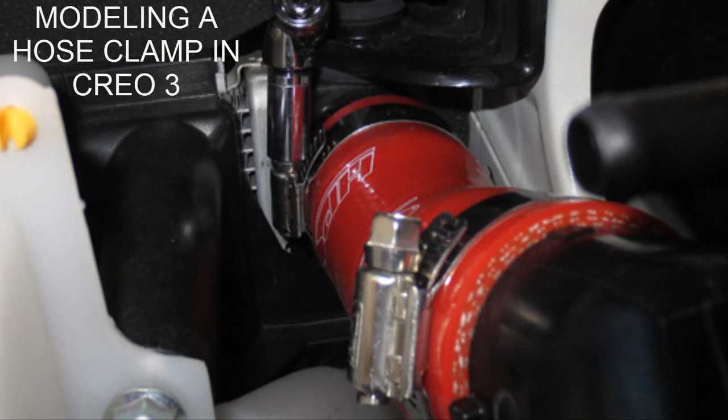This is a flexible hose clamp. It was created in Creo 3. I've got it in this example, and here it is clamped onto this larger tube. I've got a smaller tube here, so I'm going to go ahead and place it just to show how it works. Let's assemble the clamp.

It's called clamp. I'm going to use the flexibility, and instead of by value, I'm going to do a diameter of this. Select OK. Select OK. And zoom out a little bit and drag this into position. And I'm going to use this surface here and that surface there and drag it back over to here and line it up to that. Let's leave it like that.

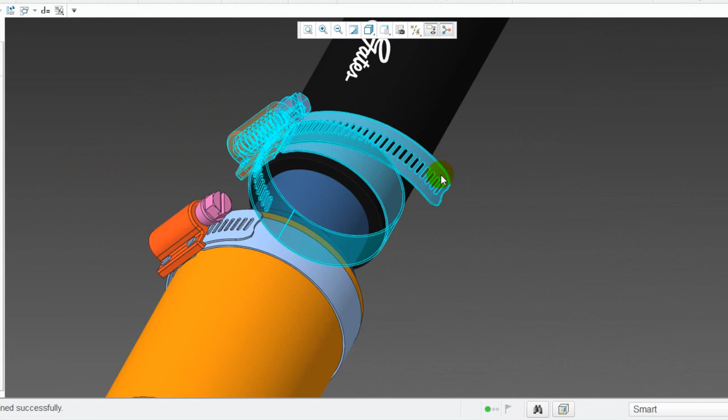So as you can see, the clamp looks like a real clamp that is used in an assembly. This piece comes out as it gets smaller, and that's what we're going to model up. It's got the slots. It's a very detailed clamp. Watching the video, you could determine how much detail you want to put in yours, whether you want to make it a part or assembly. Right now it's existing as a part, but I used other parts to create it and just merged them. That was done for relations reasons.

The screw also turns. If I open that, and I go to a cross section of this thing, you see that the slots are lined up, and that stays. If I make it smaller, this screw will turn to line it with those slots. So that's all done through relations, and you probably won't do that. You don't need it, but it's just an exercise in relations, and in this video we'll cover that.

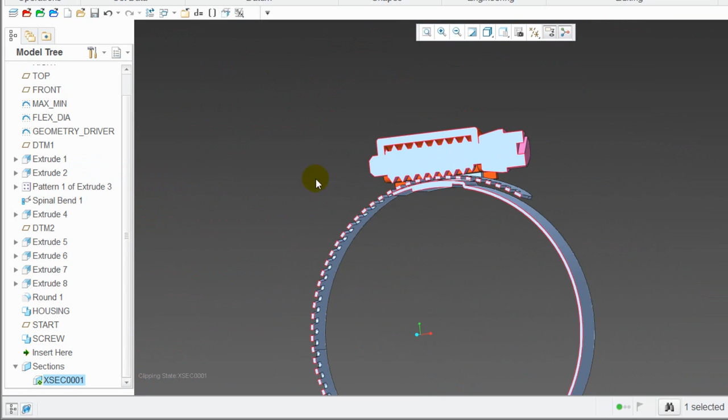Also, this clamp is designed to go from, this one here has got a max min, and you set those dimensions and it automatically creates the clamp for you. So this range here is from the catalog. I've got it out of a McMaster-Carr catalog, and I also downloaded the files from there that I needed to take measurements from. But it's set up so that the clamp will not go beyond.

If you use this in an assembly and somebody tries to put 5 inches for a clamp that only goes out to 2.625, 2 5/8, it will not. It will just go to 2 5/8 and stop. That's as big as it can go. It's set up through relations to stop it from doing that. So if somebody tries to use this on a wrong size hose, it will not behave. It will not go to that diameter.

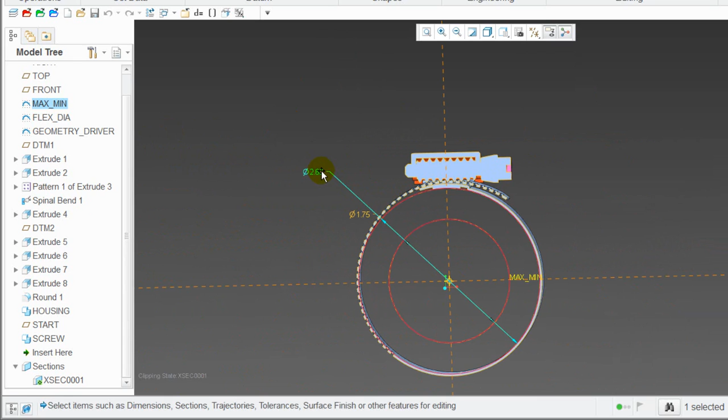But as I said, this clamp could be copied and made larger. Like say if you need another range, just look in the catalog, and there's a whole family of clamps with this screw and housing assembly. And to make a larger one, like for instance, if I want to make a larger clamp, this one's a 2. Let's say if I want to make a 4-inch clamp, I just hit 4, and it creates a 4-inch clamp for me. Regenerate, and there's my 4-inch clamp. And that's all set up through relations.

Let me get this section out of there, deactivate. So there it is. And it does some calculations on how much should be sticking out here. It does a bunch of calculations. The only thing you really probably have to do is the number of slots you want in there. You might have to tweak that as you make a new clamp. And the max min diameter.

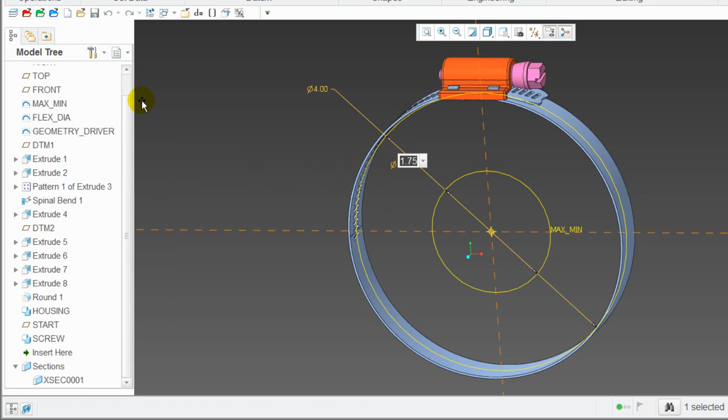So here's the diameters here. So this is the min. It won't go smaller than that. So let's change our minimum to say a 3. So it goes from 4 to 3. So now it's set up so that if I tried to make the clamp smaller than 3 in my assembly, it will not work. So let me just regenerate and show you that it won't go smaller than 3.

So here's our flexible dimension here. I'm going to edit that and try to make that smaller than 3. Make it 2. And you can see it went to 3. Didn't go down to 2. I'll regenerate that, and there we have our clamp. But it will refuse to go beyond your max min. There's our max min controls. So we'll set up relations for that. So let's begin.

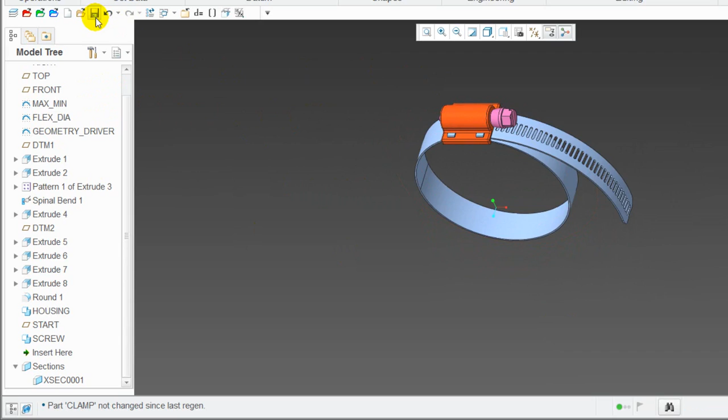This clamp was created from a part that already exists on the internet. It was an IGES that I downloaded. I went to McMaster-Carr's website and downloaded a couple files for a hose clamp, and it was an IGES file. So let me go ahead and open that IGES file. So I'm going to create a new part, and I'm going to call it the source band.

And I'm going to get data, import, and here's the IGES file that I downloaded. And I don't need log files. Okay. So this is what I got off the internet. So we're going to make our clamp look like this. Ours, of course, will be flexible, and a couple of added features we're going to put in there.

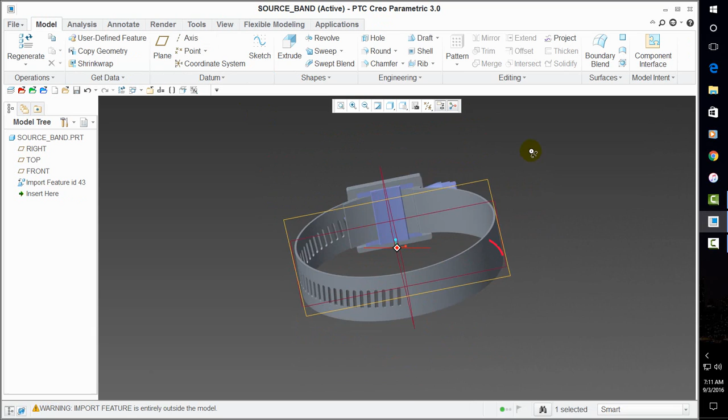We're also going to try to set it up so that we can make any size clamp with this size screw. There's a range of clamps that they make. We'll try to get ours to be able to make them all. The first thing I'm going to do is break this just into the separate parts so I can take some measurements. I'm going to make a drawing of this so I can take some measurements.

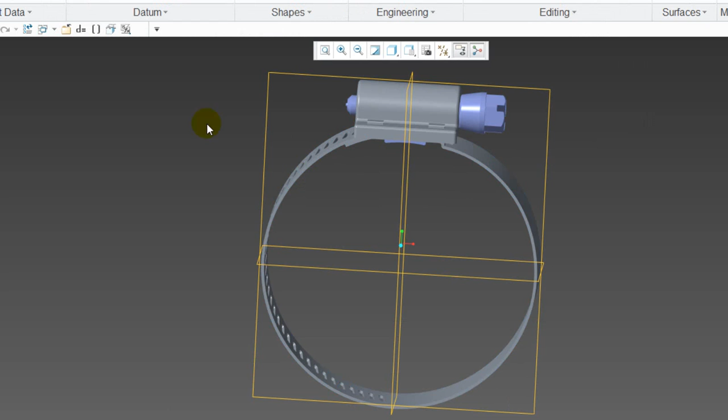So what I'm going to do is break it down into the band, the housing, and the screw. So I'm going to need to save a copy of this. So I'll do save as, save a copy, and I'll call this one the source screw. And I'll save a copy again. I'll call this one the source housing. Okay, so what I'll do is I'll take measurements from here. I could take measurements using analysis and measure, but I think it's faster to create a drawing.

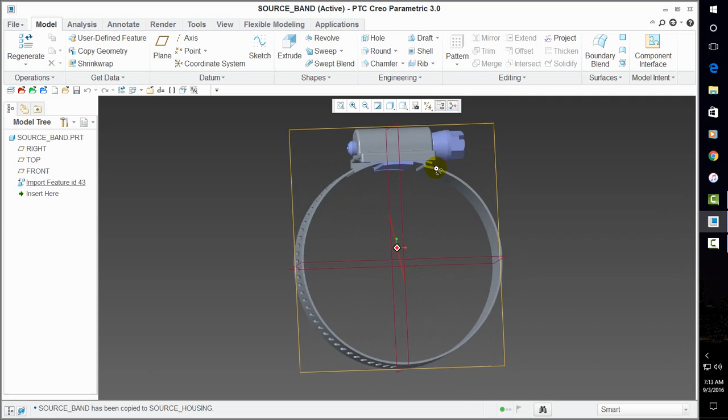I'm not sure if Data Doctor comes with all versions of Creo, but the version I have does have Data Doctor, so I can break this down into individual components, because the IGES was created from an assembly file. So they made an assembly of this thing. And if you have Data Doctor, you can break it down. If you don't, you'll just have to measure everything you can from one part. Maybe just do some cross sections and take some measurements.

But we have Data Doctor, so let's just get the band for this one. So we're going to go to the import feature again and edit definition. And here's Data Doctor here. And once you get it in Data Doctor, the components show up over here. So I'm going to keep everything, but I don't need the screw. I don't need that housing. There's the band I need. So let's just delete those and hit the check. And let's save that. So that's our band.

And one quick thing, this purple piece did not come out as a solid, so we'll have to remember that. It probably came in on some planes. It had some problems. Let's see which plane this thing. Oh, I think I'm gonna get rid of all these planes. Planes, layers. So I got rid of all those layers. My part has default layers, axis, curves, and planes.

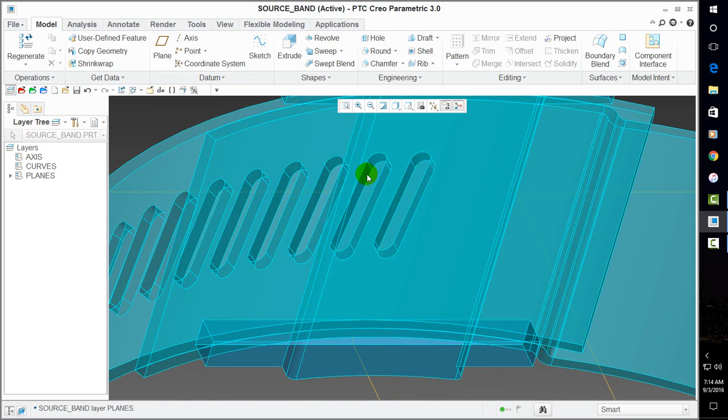Also, we are going to be making some very small features, so your accuracy has to be set. I've got mine set for all my models, but I don't like using Creo's default. And to do that, I've got to go to my model properties. I've got it on my quick access toolbar, but you could find it here in the file, and then you'll find it in prepare and in model properties. If you want this on your quick access, just right click and add it. So let's go to model properties, and I've got mine here.

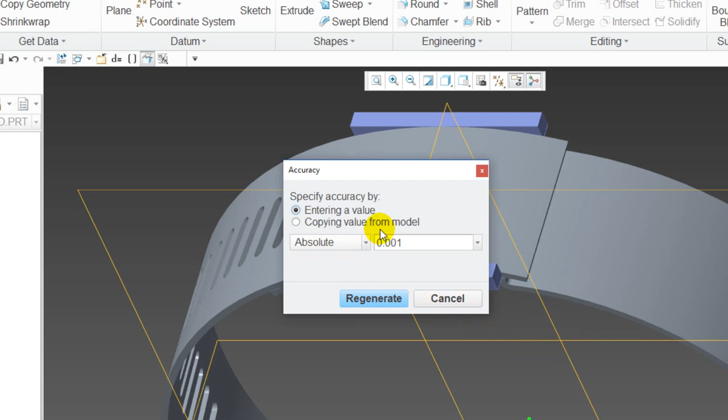And I've got mine set for absolute. By default, Creo has a relative. And all of my inch parts are absolute 1/1000th of an inch. This is my setting. So you'll need to set yours that way too if you're going to make an inch part anyway. Because we are going to be creating some small features. And your start part should be set up for that. So I'm just going to save that.

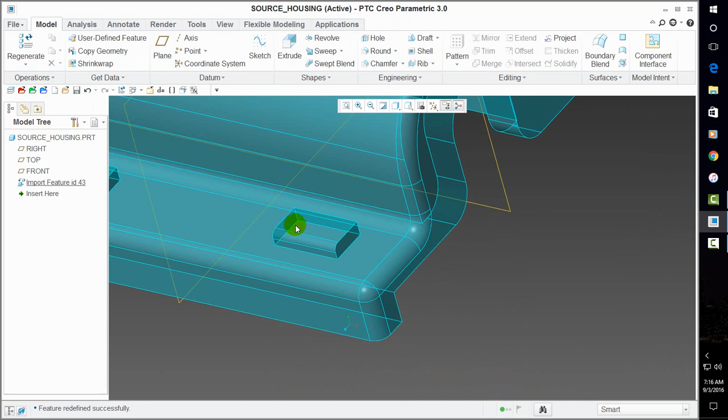And let's open up the rest of them and fix those up. So the band is done. Let's do the housing. So the same thing again. Go to Data Doctor and get rid of everything but the housing. You see the housing has a pocket up in there. And these pieces on top of the housing, that's actually part of the band. We're going to be modeling those in the band, so we'll have to get the dimensional information from the housing here to get those top pieces done. So let's save that, and let's open the screw.

And now I'm going to create a drawing. I'm just going to call it the source. And I don't want to use a default template. I'm just going to put it on a C size. So the first part is pulling in, this last part I had open, source screw, so that's fine. We'll do that. So my default part is source screw.

So let's enter a general view. And let's do front for a view front. And let's scale this up so our dimensions don't get too crowded. Let's make that like 6 times, maybe 8. Let's try 8. Try to fill up the sheet here. This is just so our dimensions don't get bunched up. So I'm going to make a couple projection views here. And I'm going to turn my layers off.

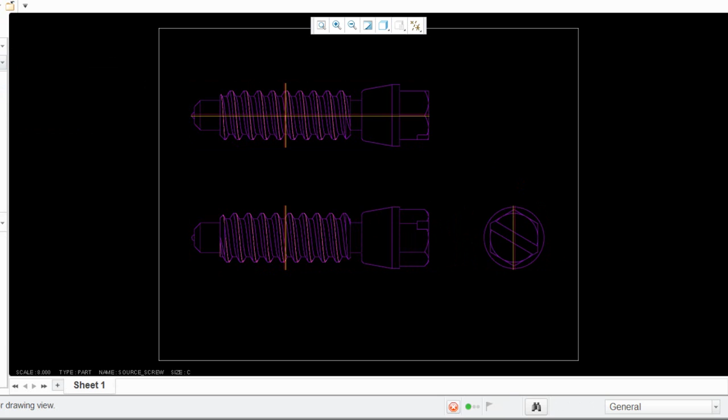And now I'm going to go add a sheet. And we're going to go get another model. So I'm going to go to drawing models, add a model, and let's do the housing next. Insert a general view. Front view. Okay. Scale it. Let's make this 6. Projection view. And projection view. And let's turn our layers off.

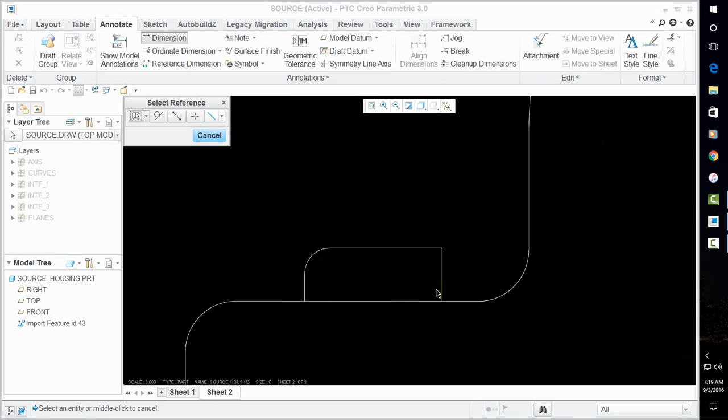And these pieces right here are going to be part of our housing, and that's the part we're going to model first. So let me go ahead and dimension those up. So go to Annotate tab and hit Dimension. Creo 3 is a little bit different, man, dimensioning drawings. You got to hold the Control key down now. I'm going to need this thickness too.

I'm going to go 4 decimal places. I want to see the real numbers here. I don't want rounded to 2. I'll round to 3 just to make it a little bit more accurate. So I'll go to Properties and let's just do 3 places, that's fine. I could default mine to that with a config setting, but I do a lot of metric stuff and that's the way I like it, so I'm going to leave it alone.

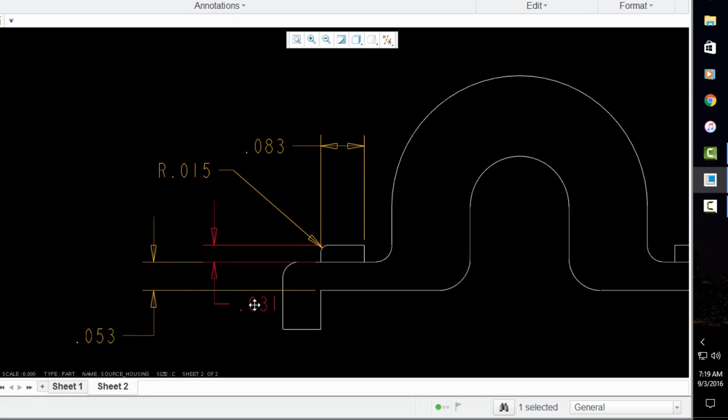Okay, so we have all the dimensions we need from that view. I think we just need 1 dimension from this view.

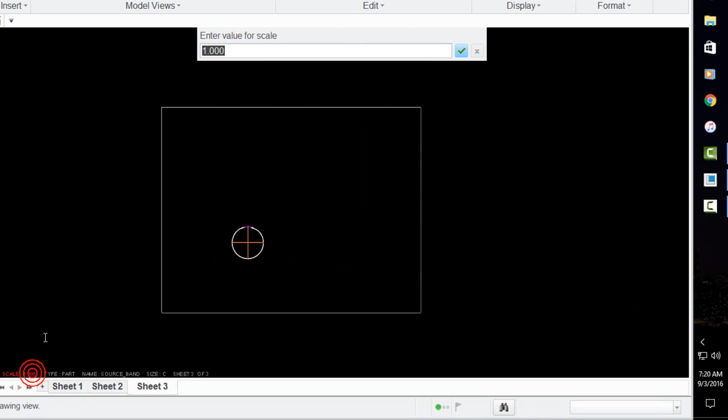Okay, and let's add another sheet for the band. Let's go to our layout, drawing models, add a model, and let's put the band in. Insert a general view, front, and let's get that scaled up to say 3. Yeah, that's about right. Insert projection view, and a projection view again. And let's hide our layers. Save status.

Okay, so for the band, it's just going to be simple. We're going to do a spinal bend because we're going to go ahead and put these slots in there. So we're going to need to do a spinal bend. So we're going to draw a spine, and it's going to have this little S in there. It's going to go around.

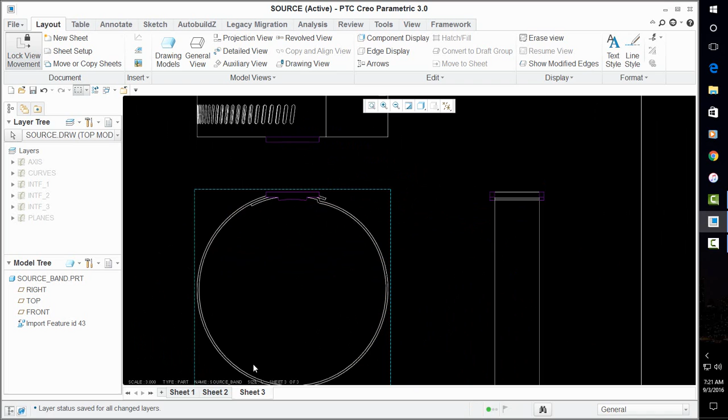Ours is going to go around about 3/4, so we'll have a 3/4 correct diameter, and then the band is going to go over and overlap. So we're going to have this overlap in there, and then we're going to create this purple piece. This piece is there for mounting our housing, and it's actually welded to the band. So let's go ahead and get some dimensions off of this. Let's go to Annotate, Dimension, and Overall here.

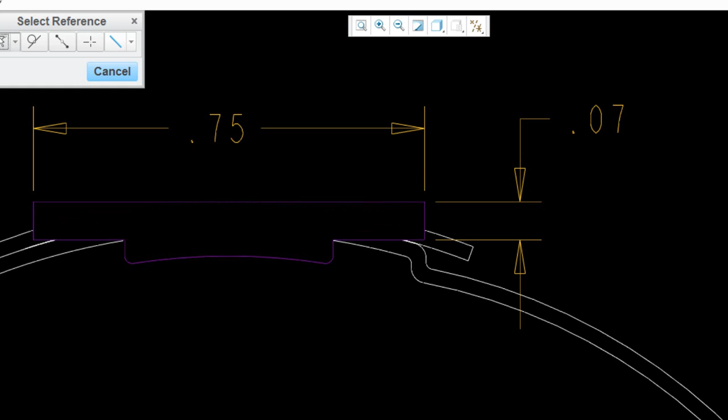Oh. And we're just going to make this piece the same diameter as this, and we're going to let that change, even though in reality it doesn't, but we're just making a model that's going to not give us interference. In reality, this thing actually embeds itself into the hose, and we're not going to do all that. We just want a good representation of the clamp.

And let's get the overall width. The bandwidth. And how about the thickness of this? Oops.

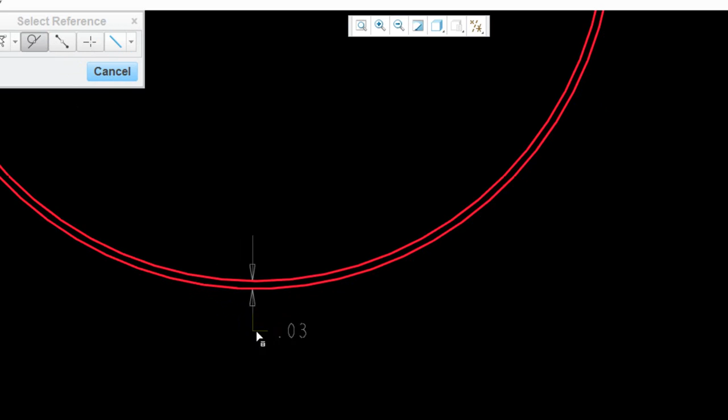And I want to change all those to 3 decimal places, so I'm going to go down here and select my dimensions, do a window around everything, properties, 3 places. Should be good enough. Yep, so our band is 28 thousandths, 5/8 wide. And the only other information we're going to need from this is going to be these slots.

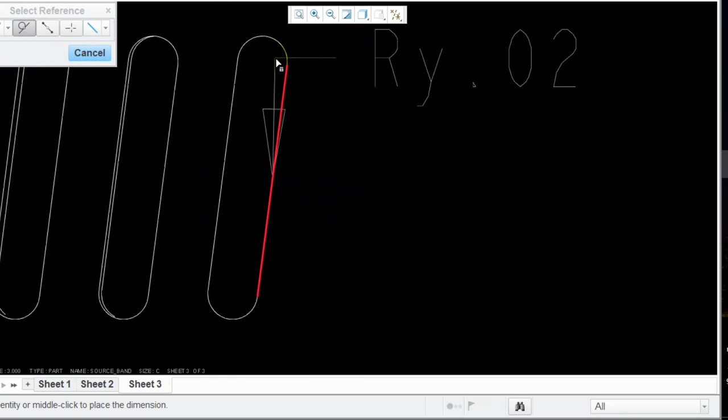So these slots, if you try to dimension them, you'll find that these look like straight lines, or highlighting the straight lines, but they're not, because they came in deformed. This is an IGES file. So the only dimension that we can get from here is this angle. So let's go ahead and measure that angle. Let's put a dimension on there.

So dimension, let's do the line. Draw an imaginary line, because there's just a bunch of points here. So we're going to draw an imaginary line. So I'm going to select 2 points, that point there, control key down, and some point at this end, and there's our imaginary line.

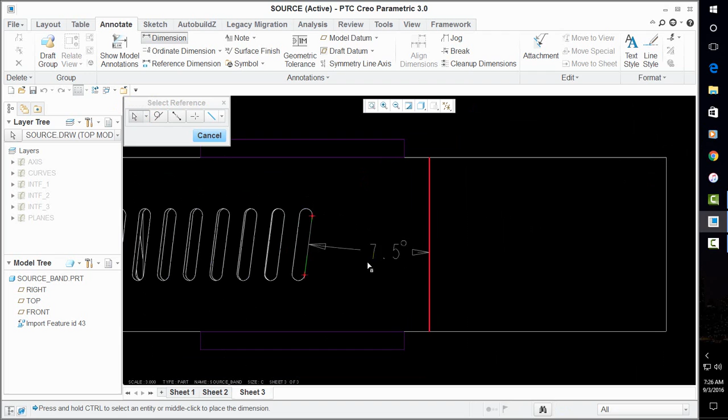And then I'm going to hold the control key down. Oh, got to select over here, hold the control key down, and let's do, yeah, this is fine, that one, and that gives us our angle, 7.5. So there's all the dimensions we need, 7.5. That's all that we can get from the drawing.

These slots are going to have to be measured, so let's just measure those slots and write it down. So to measure the slot, I'm going to go to Analysis, Measure, and I'm just going to do between 2 lines. So that line, and there's one over here, right there, that line. And that distance was 0.2135, let's just say 21.

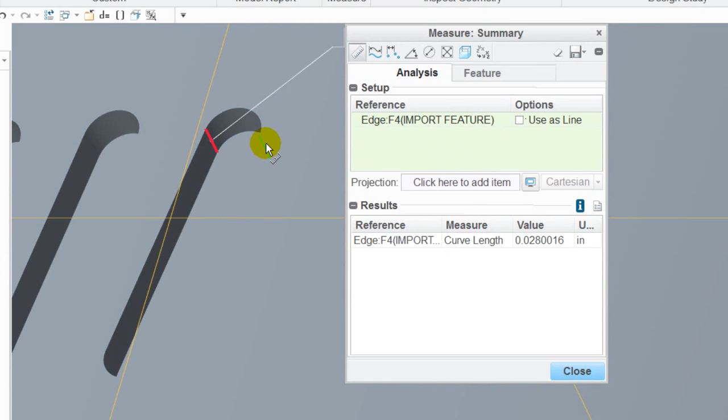I'm going to remove this one and do the line over here. There's a line over here, control key down, pick that one, and now we have the width of our slot, and we're just going to say 0.046. That's all we're going to do. So I wrote that information down.

Now let's go ahead and make the band. So let me close this, let me save my drawing. Okay, we're ready to go. So let's go ahead and make the band now. And like I said, we're going to make a spine. The spine is going to go in the middle, and I'm going to do a quick demo before we make that to show why I'm doing it in the middle. It's because of this S. Let me get out of here, and we'll create a new file, new part. We're going to call this our clamp.

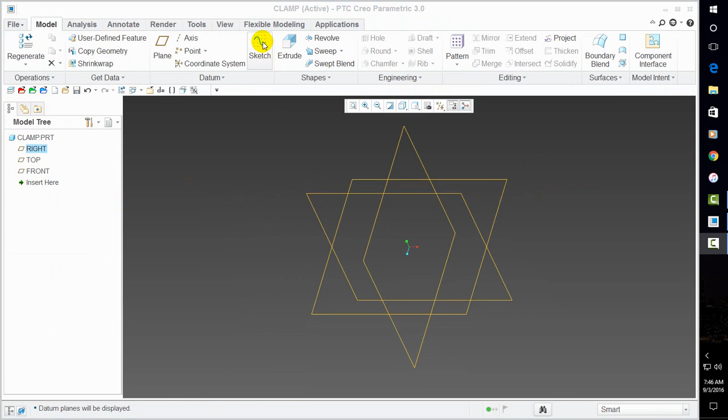Before we model our spine, I'm going to model up a temporary one just to illustrate a point. So I'm going to select Sketch, and I'm going to select front plane and sketch on that plane. And I'm just going to create a line from here to there. I'll make it like 5 inches long. So there's our line. And I'm going to create an arc, a 3-point tangent end. There, to there, here, to there. I'm going to make them equal.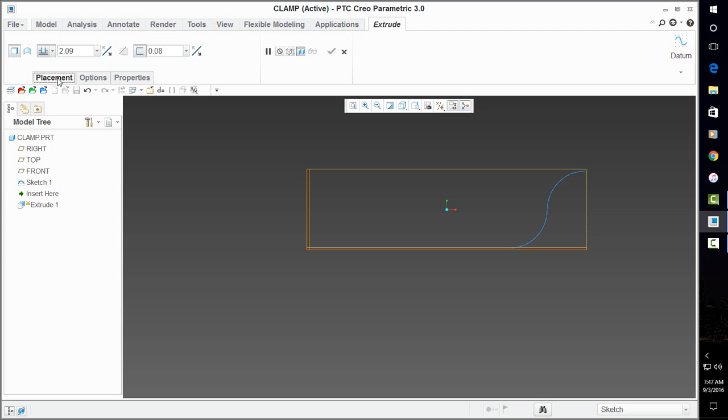Select OK. And then I'm going to draw an extrude. And I'm going to make it a thin. Now for placement, I'm going to use the same sketch plane. Use previous. I'm going to turn off my planes here. Now I'm just going to draw a straight line. Somewhere there to there. That looks fine.

Now it's a thin, and it's creating all the material on the top side, and if I click this again, it'll put it on the bottom side, one more time in the middle. But I'm just going to put it at the top for the demonstration, just all the material on one side, just to illustrate something. So there's our material, and I'm going to use a spinal bend to make it form into this. Now the material will stretch to fit this spine. If it was too big, it would shrink to fit it. And we're going to make those adjustments when we do our clamp. We'll set up some relations for that.

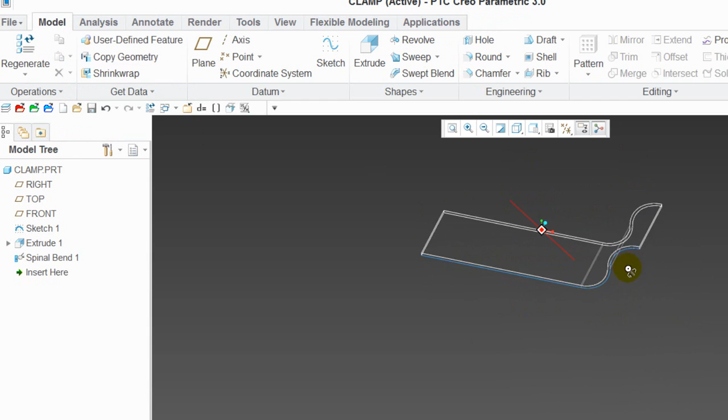So what we're going to do is just use a bend here, a spinal bend, and it's asking me to click here to add bend geometry, and then click over here to pick the spine, and I did, and you can see it has given me a preview. It's worked fine, and there's our spinal bend. So it did stretch the material to meet the ends. You could lock that and keep it from doing it, but for our case, we want that to happen.

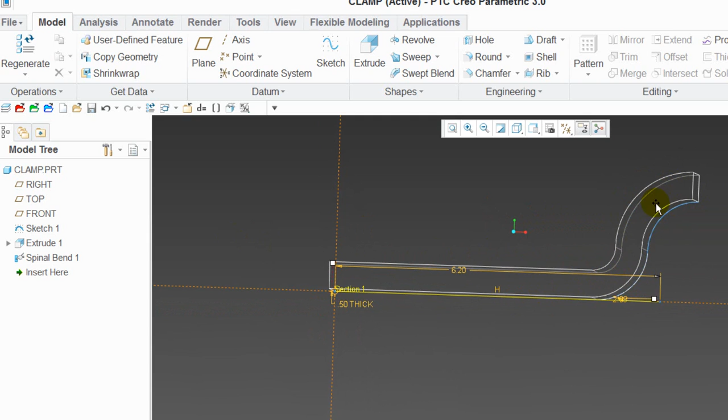Now watch what happens when this band gets very thick. I'm going to make it, say, 0.5. So you can see how this S is not being created correctly. It's like there's a different radius here. This outside radius is different from this outside radius. I want those to be equal. That's how it is in our IGES file. Those are equal. So by having the spine like this and having the material on one side, it doesn't create what I want. So I want that material in the middle so I can have the spine in the middle, and it will be equal when I do that.

So let's go ahead and do that. Let's go to Extrude and Edit Definition. And this time let's put it in the middle. So that's the bottom and this is the middle. Select OK. And now you can see the spine is working fine. These are the same. And that's what we're going to need when we do our band. So let's start over. Let's delete this. Oops, forgot to delete them both.

And let's redefine this. Let's delete everything we got. Go to Sketch View. Mine doesn't automatically go to Sketch View; I got it set up that way. So the first thing I'm going to do is draw a circle for the diameter, the hose diameter that we're going to be clamping. Ours has a maximum value of 2 5/8 and a minimum of 1.75.

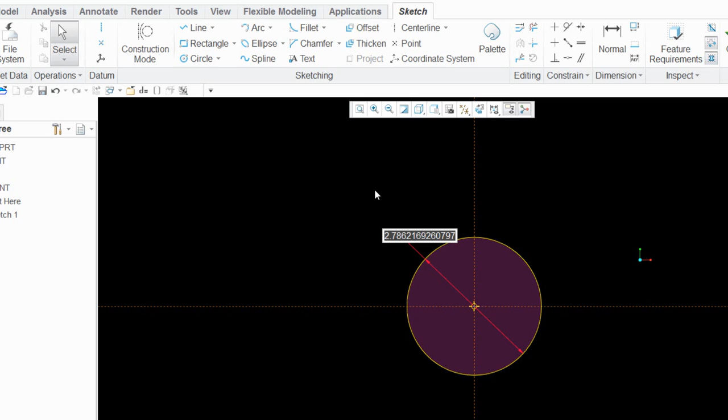So let's set it at maximum 2.625, 2 5/8. Now this is going to be our driver. This dimension here will change. We're going to have a flexible dimension that's going to change this dimension, and that will be explained later why we're doing that. But for now, this dimension is going to change. It's going to change the size.

So if we were to use this as the spine, half the material will be on the inside here, half will be on the outside. We don't want that. We want this to be the inside diameter. If we were to do this, we would get half a band thickness sticking on the inside of our inside diameter. We don't want that. So we're going to have to create our spine. This is going to drive our spine, but this is not going to be the spine. This is just going to drive it.

And I'm going to go ahead and create an arc, center ends. Now this will be our spine. I'm going to pick some point here, swing it around, and click it here. So our model is going to have good geometry. This diameter is going to be the correct diameter all the way around through this. Then it's going to overlap. Okay, we're not going to go into some elaborate thing where we actually compress the hose or anything like that. We just want a good representation of the part, a good model that looks just like the part.

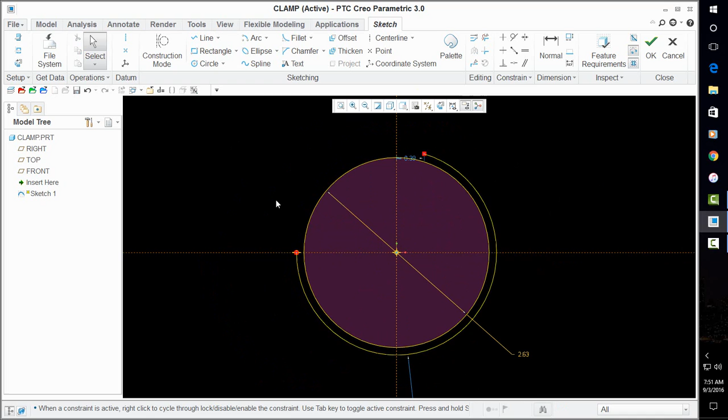So to get this, I need this to be 14 thousandths away from this, because the band is 28 thousandths. I need half of it to be on this side and half of it to be on this side. So to do that, I'm going to create a circle, put it at the intersection of that horizontal reference and our arc, and then I'm going to snap it to tangent right there. I middle mouse to lock it on there, so it's locked now. Middle mouse will lock it, so I have my tangency there.

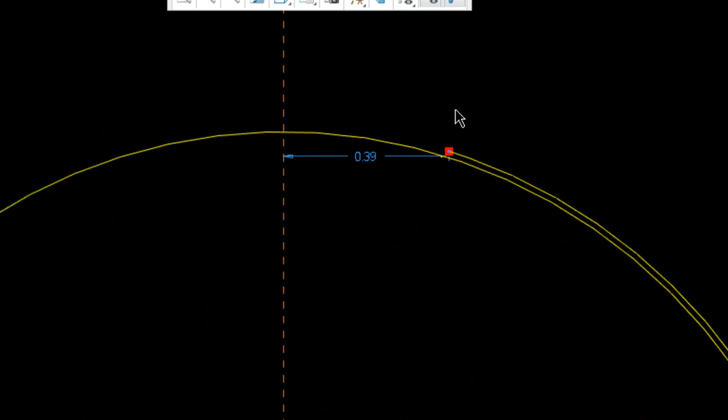And now I'm going to put a dimension on there. I'm going to double click this to get a diameter dimension. And that's 0.028, the thickness of our wire. So now our wire will be half on this side, 14 on this side, 14 on this side, which matches our inside diameter. Now I'm going to create the transition where we go around that bend there, that S bend that we just demoed.

And let me create another arc. And I'll go from here somewhere over to here somewhere. Don't let it snap to anything. Don't let it auto-constrain something. To do that, let me just do that again. Let me just create this arc there. See how it's trying to snap? It might try to snap to things that you don't want it to. So like if I pick here, it's trying to snap to there. You see that one, that constraint there? Watch for those types of constraints being brought in.

Don't let it snap to anything. And to do that, you can hold the shift key down and it won't snap to anything. I'm holding the shift key down. If I don't hold the shift, I get the automatic snaps. Holding the shift key down won't let it snap to anything.

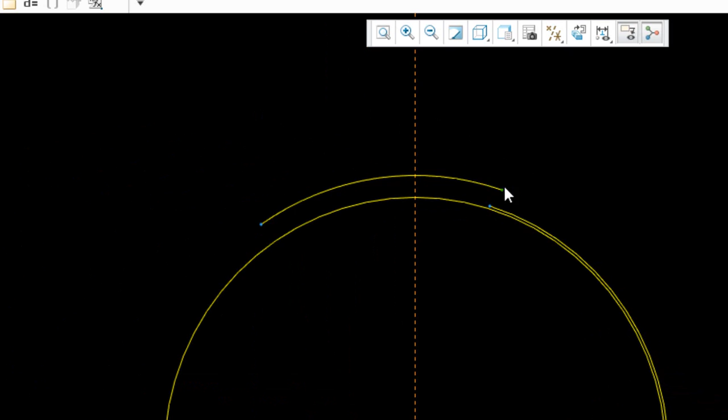So I'll bring it over here somewhere and create another arc, but this time it's going to be a 3-point tangent. And we'll create it something like that. And then again, from the end of there, over to there, make a tangent. So these two are tangent. I need tangency over here, so let's go grab it. Tangency. So they're all 3 tangent. So I'm going to do a corner trim, this piece and this piece. And then I want these to be equal radius. And that's what we want.

Then we're going to set up some relations to get them to the correct size. But right now, I just want to demonstrate something. If I move this curve, see how these arcs are behaving? I don't want them to do that. I want them to stay on a common diameter reference. So I'm going to line these centers of these 2 arcs up to a diameter that's centered on this one.

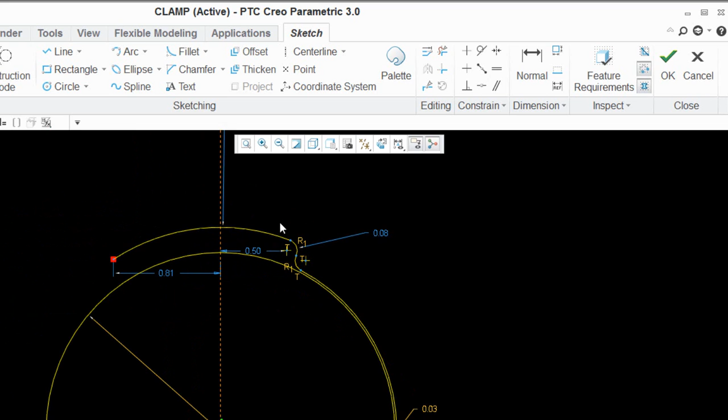So I'm going to create an arc, center and ends. Oops, center, pick here and close to there, and let's go get our constraint here, our coincident constraint. So that will line these 2 up, the end of that arc to that center. So now they're lined up. They share a common arc. They're both the same size. Now when I move this, this dimension here just gets smaller and bigger as I move it, and that's what we want.

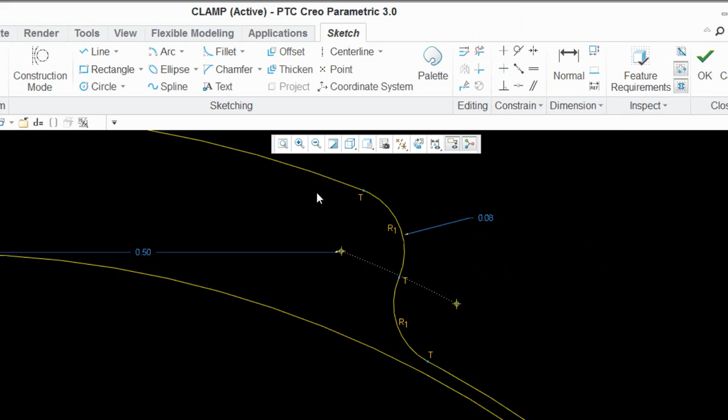That's the action we want on there. And I'm going to create this as a construction line, so I'm going to click on it and go to construction. So it's a construction line. Anything that's not part of my spine that's going to be used to create my geometry, I'm going to make that construction, including this piece here. Okay, and this circle here. Alright, so anything that's not part of my spine is going to be a construction.

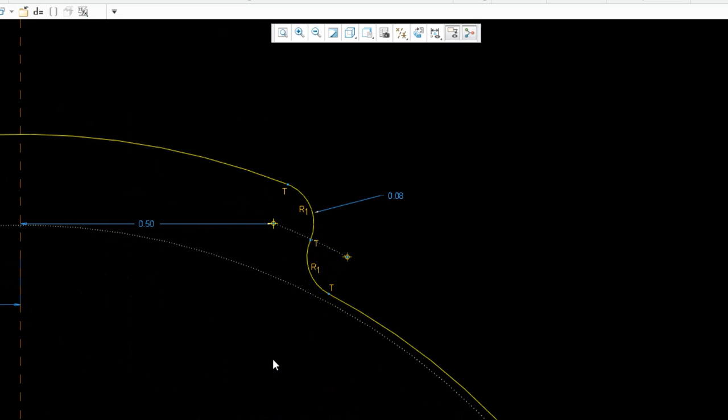Next, I want to set up a relationship between these arcs and this diameter, and I want this arc to be a little bit bigger than half of that diameter, which is basically a little bit bigger than this radius, just a little bit bigger. And I'll show you the results of that when we create our spinal bend and what would happen if we didn't make it a little bit bigger.

So let's set up a relation, and relations are in the tools, relations. Mine is in the quick access toolbar here. And to do that, you just click on relations and move it to the quick access toolbar. So I'm going to select relations, and I'm going to select sketcher dimension 12 here. I'm going to set that equal to, I'm going to do a space equal because I like spaces so I can read it. And I'm going to select sketcher dimension 5, and I want to multiply that by 0.55, a little bit bigger than half. So there it is, down to size. Now this is a driven, relation-driven dimension.

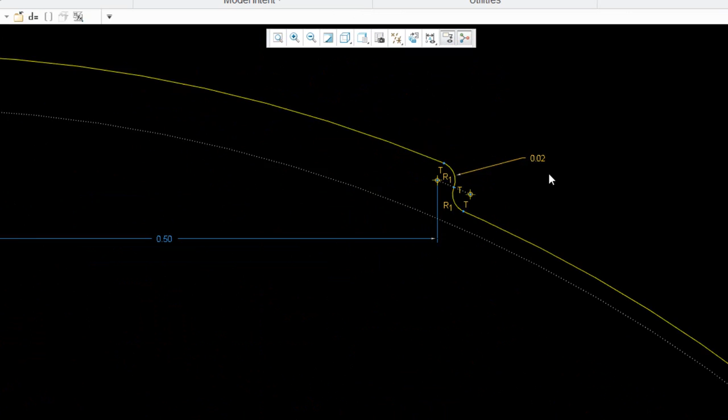Next I want to come over and I'm going to draw an arc here. Let's go back to our sketch tab, and I want the 3-point tangent end. Pick the end of our arc there, and now it's automatically tangent, so let's bring it somewhere close to there, and then over another one that's tangent. And then don't let it snap to anything, like see it's trying to snap to a radius, or see that radius trying to snap in. Don't let it do any of that.

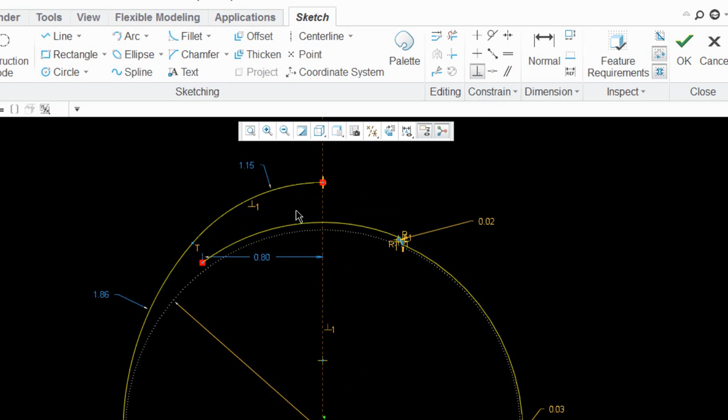Let it bring a point, put it on that vertical. Oh, I didn't do it. I was going to put it on there, so let's go ahead and do that. Make it coincident. This point should be on this line. Another thing, I want this arc to be perpendicular to this line, this reference. So I'm going to hit the perpendicularity and select this piece, and now they're perpendicular, and basically that just puts it right on this line. That center of that arc is now on this line. I could have done a constraint there. I like this one better, perpendicularity, personal preference.

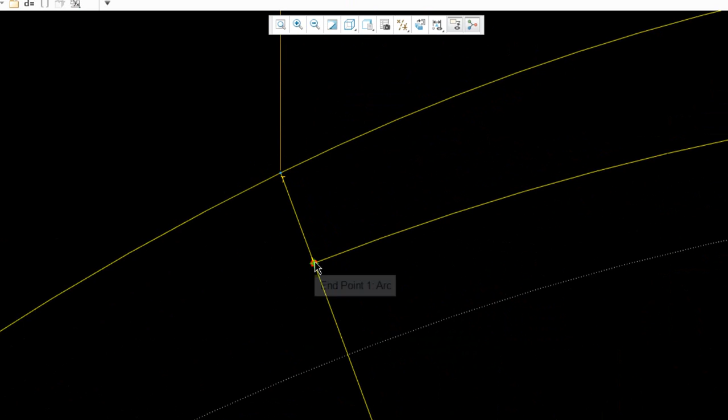Next part of the construction, another line from the center out to this point right there. And then I'm going to align this end to this line. So alignment, this end to this line. And I want a dimension. I don't want radius dimensions, so I don't have to do calculations on what they should be. So I'm going to set up some other dimensions to get rid of them. I want this to be a dimension, and let's make that 0.5. And this material is going to be 28 thousandths thick. So the distance between these two has to be bigger than the wire, the band thickness.

So if I draw a circle here, I'm going to just put it out there, no dimension on it, no constraint. It should show up with a dimension in it. Then I'm going to make this tangent to this. Now this radius, which is this distance here, has to be a little bit bigger than the wire, the band thickness. So that's what I'm going to do. This is a diameter dimension, so I'm going to go to dimension and click this once to get a radius dimension.

And I'm going to make that a little bit bigger than the diameter of the wire, this diameter down here. So I'm going to go back to my relations, and I'm going to select Sketcher dimension 25. I want that to be equal to Sketcher dimension 5 times 1.1, a little bit bigger than that diameter. That's what you get. And this line, this circle, and this line construction.

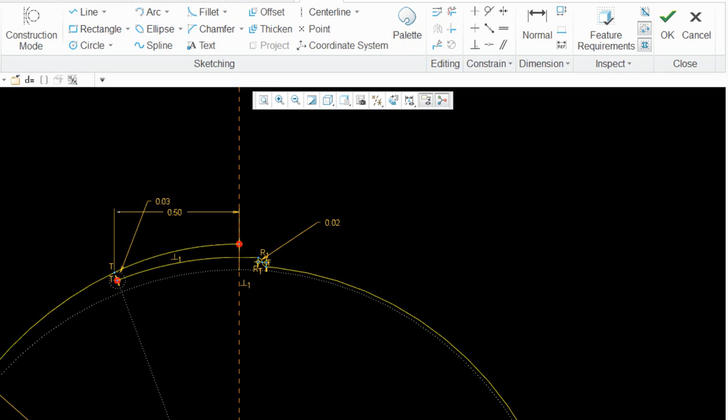So far we need one more piece, and that's the piece that hangs out here. As the clamp gets smaller, when we flex this thing, this piece that I'm creating will come out further and further. So another 3-point tangent end. Pick here, the end point. It's already tangent, so just bring it out to here somewhere.

And I'm going to set this up initially to be bigger than the radius of our inside diameter. So it's going to be a little bit bigger than 2.625 divided by 2. I'm going to make it 1.4. See how that's sort of pointing towards my arc? I want it to point away.

And we're going to set some relations up. When we create new clamps from this one, we want this to all be automatic. Right now the way I'm setting it up, if I change the wire thickness, everything is going to change proportionally and I won't have failures. If I want to change this thickness, I want all these relations to be held true, so that if I do change it, I don't have to go in here and mess with this curve.

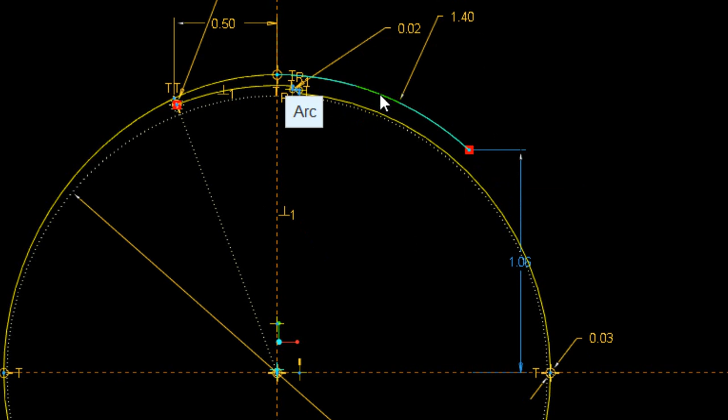Need another line to go to here. The reason why I don't like this dimension controlling the position of this endpoint is because as this comes out, it'll fail. As soon as I try to go to 0 here and flip it to the other side, it'll fail. So I need an angular dimension. I'll put it from there to there, and get rid of this dimension by making an angular dimension. So now I don't have that linear dimension.

Make that construction. And now for our final dimension, we're going to throw a perimeter dimension on here. Because when we change this inside diameter, the combined lengths of these arcs cannot change. You don't gain and lose material when you change the size of this diameter. So this must remain constant. So we're going to create a perimeter dimension.

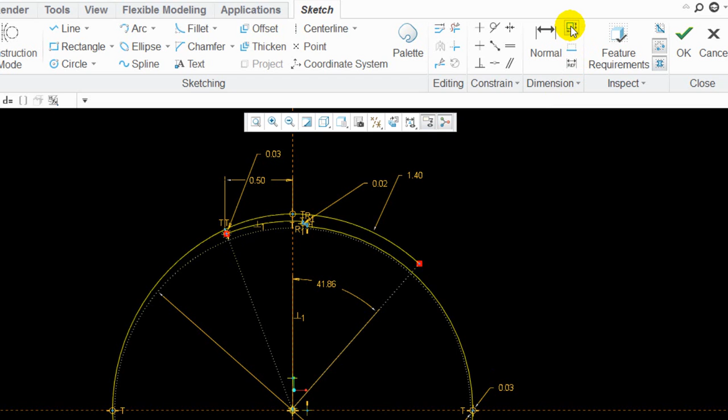So I'm going to click up here on perimeter dimension. It's telling me to select one or more items, so I'm going to select all the pieces in my spine. That piece, control key down this piece, this one, and so on. One more over here. I'll select OK. In the lower left, it's telling me select a dimension to be driven by that dimension. So I'm going to select this one that I just created. And now that's a variable dimension.

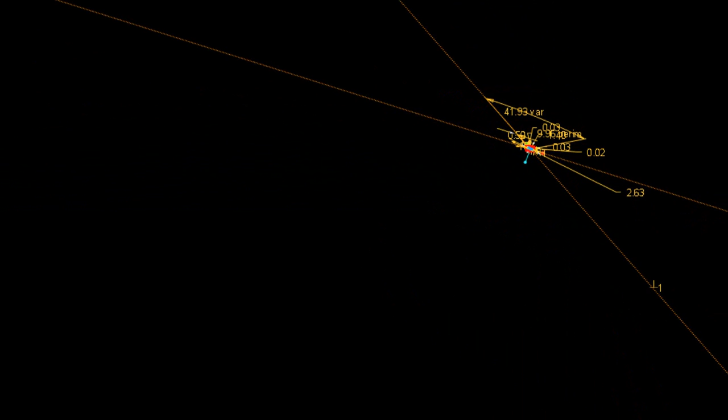What that means is this is going to change if I change any other dimension, to maintain the perimeter. For some reason, Creo likes to throw it way out in space, but just grab it and bring it back. Go to sketch view. So there's our perimeter dimension. Even when I change the inside diameter, this is going to be constant. To make it constant, this dimension will have to get bigger.

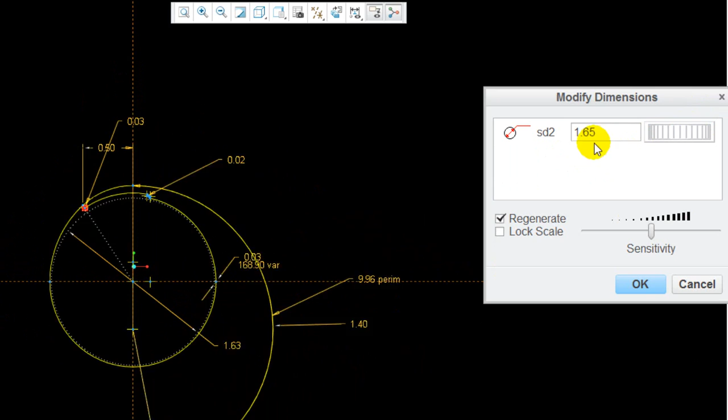To demonstrate that, I'm going to select this dimension and modify. Let me move this out so you can watch. This dimension is going to stay constant, and this one is going to vary as I modify that inside diameter. Notice the 9.96, and you'll see what it's doing as we get a smaller diameter. That's exactly what we want to see happen. Cancel. I think we're done with this, so let's select OK. And there's our curve. Let's save that.

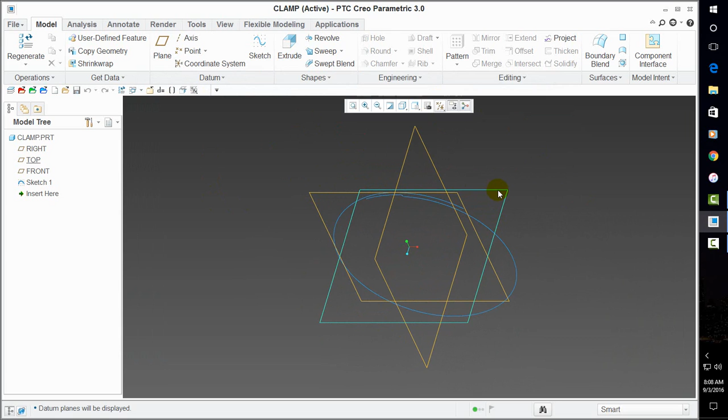Okay, so now we're going to model the solid geometry and have it bend around here. Let me turn our planes back on and get it in default orientation. If I try to sketch using this sketch plane and this reference for orientation, and I sketch a line at the end of this going straight out, as this clamp gets smaller, this point moves. So it's going to throw my sketcher off. If it goes all the way around to the other side, it could flip the other direction. I've seen that happen.

So to ensure that that does not happen, we're going to create our own orientation plane for our sketch. I'm going to have it go to the end of this arc and normal to the arc, so that it will always be in the correct orientation. It will never change. When you're in the sketcher, it will never change. Even though this is moving, the sketch reference frame is moving with it.

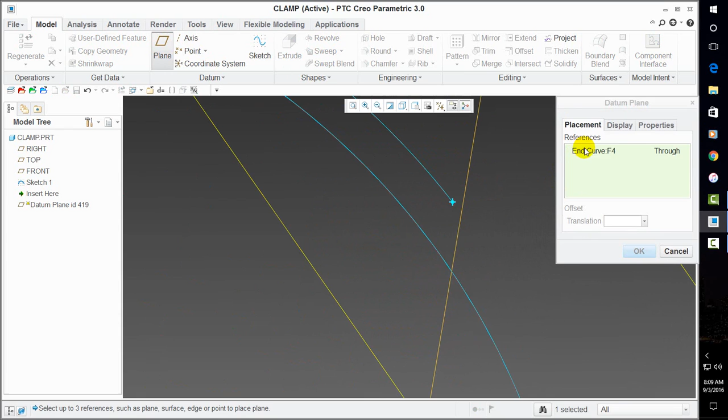So to do that, let's go ahead and create a plane. I'm going to pick the end of that arc, and you'll see end of curve. Control key down, pick the arc itself, and normal, and that's what we want, through and normal. So there's our plane. We're going to use that for orientation. I'm going to set that plane to orient this in a certain way, and it's going to maintain that orientation no matter where that point goes.

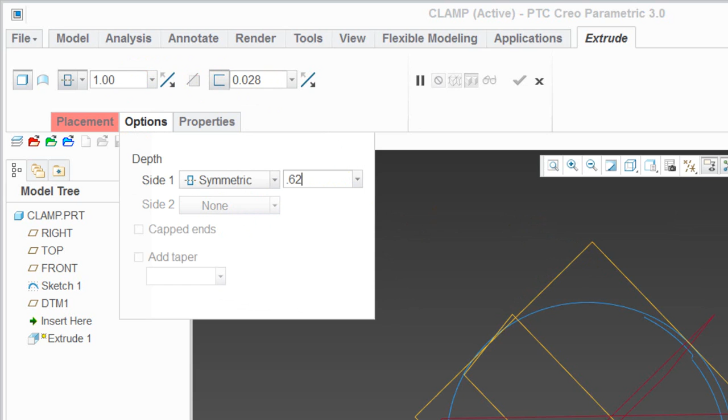So now that that's set up, let's create a sketch, extrude, and we're going to make it a thin. It's going to be 0.028, so let's put that in. And it's going to be 5/8 wide, so let's put that in. And it's going to be symmetric, so let's go to options and make it symmetric. I want the material on both sides of the front datum plane. So 0.625 symmetric about that sketch plane. And I'm going to select our sketch plane here.

And Creo has automatically selected this plane here for orientation. Look at this. It's selected the right plane. I don't want the right plane for my orientation. I want the plane that I just created for my reference orientation. So I'm going to click in this box and select the plane that I want. This is the plane here that's connected to the end of that. So I'm going to put that one in there and select sketch, sketch view,

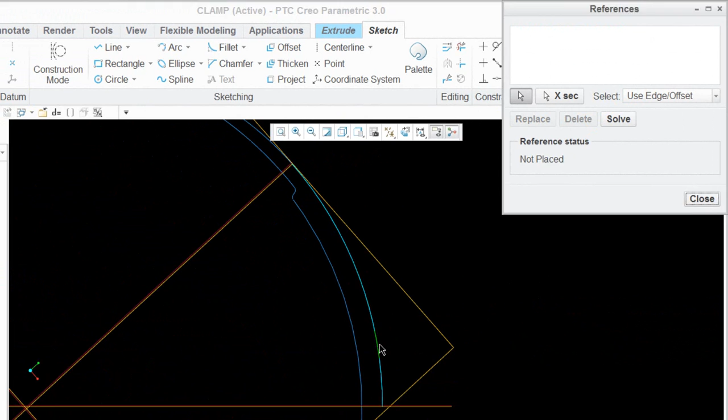and I'm going to get rid of this datum 1. I don't need that. The only thing you need for reference is this arc itself, not the end of the arc, just the arc. Select close, and I'm going to turn my planes off. And now I'm just going to draw a line, and I'm going to make sure it's tangent. I'll lock it on with a right click. It doesn't matter how tall, we're going to set relations up for that. Select OK.

And now you can see that our material is being created on one side. We want it in the middle now. So let's just select this and get it in the middle. Other side, and now the middle. And that's what we want. So there's our material. Let me get it into a shaded mode. There's our material, and you can see it's symmetric about our sketch plane. Half of it's on one side, other half on this side.

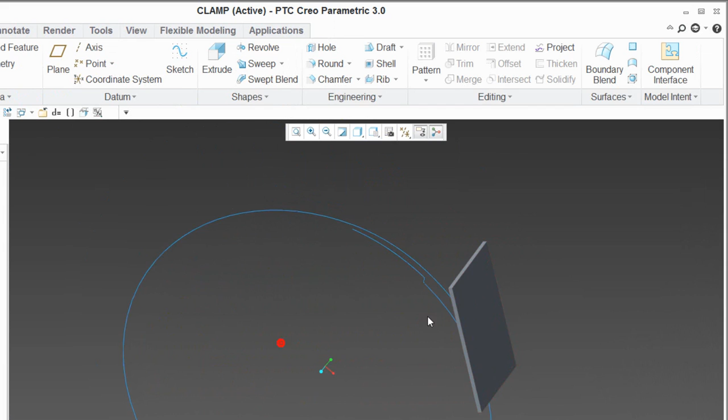Now what we need to do is set the relation up for the length of this piece. Because if we just use it this long, it'll stretch it around there and make our material. But we're going to be putting slots in here, and if we do that, it'll just stretch those slots. So we want to make the length of this extrude here the same length as the perimeter of this arc. So let's go ahead and do that.

We'll go to our relations again. Remember, it's in tools, relations. And I'm going to select this feature here, and I'm going to select dimension 28 there. That's the length. I want that length. Click in here, space equal. I put spaces just so I could read it. And I need it to be equal to the perimeter of this.

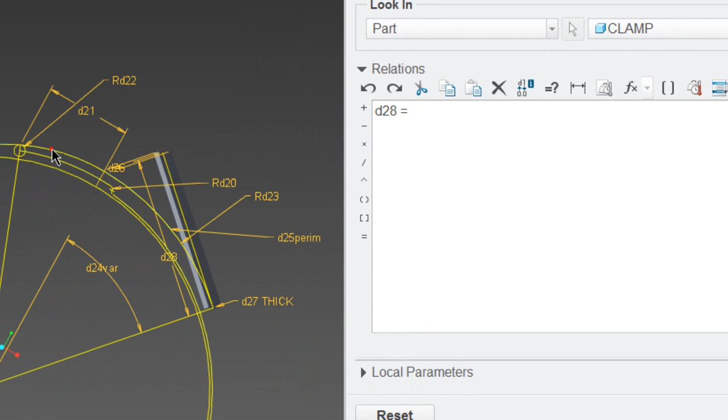And there's the perimeter. Creo puts PERIM after a perimeter dimension. It automatically does that. So I'm going to click it, and I want those to be equal. Select OK, and I'm going to regenerate. So now this piece is the same length as that arc, those curves together.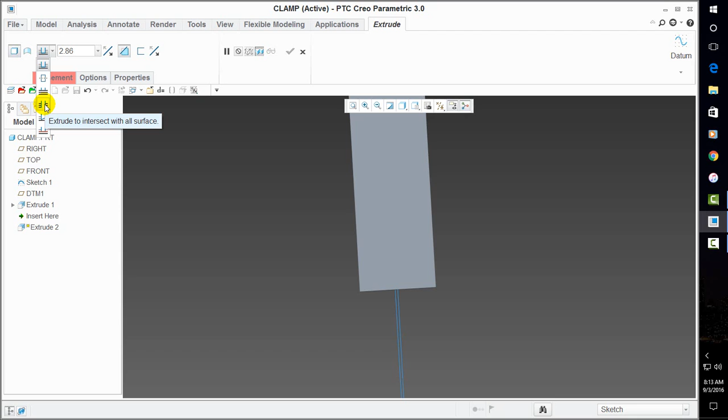Okay, so let's create some features. I am going to create a couple features that are actually not on the model, but I see it on the part. So I'm going to go ahead and create those first. Just some end tapers, lead-in tapers. So I'll do an extrude, and I'm going to remove material, and I'm going to go through all, which is this one here. All surfaces. So it's just going to go through everything.

And then for my placement, I am going to define it as this surface of our protrusion extrude right here. And it's selecting automatically the right surface to be the right side.

I'm going to say that's fine. I'm going to sketch. I'm going to also need a center line down between here because I'm going to make a symmetric feature. So I'm going to need this front plane as part of a reference. So I'm going to select my references here and select that front plane. And that put a center line in for me. That's why we made the piece symmetric, so we can do this.

So let's go to sketch orientation here, sketch view. And I'm going to switch off shading. And I'm going to create a center line, a construction center line, not a center line, it's a construction center line. I'll put it vertical, lined it up to there. Next I'm going to put an arc on there, a 3-point tangent end, but there's no end here. So it's not going to snap to any end. So put it there and then somewhere over here.

And let's lock on right-click tangency. Let's right-click tangency there. Let's draw a line from here to here to here. And I don't want to have a radius dimension. Make sure these are tangent. Those are tangent, right? Yep. Okay. I see two tangencies there. Oh, that's tangent with that. Never mind. Okay, so instead of radius dimension, I'm going to put two dimensions here.

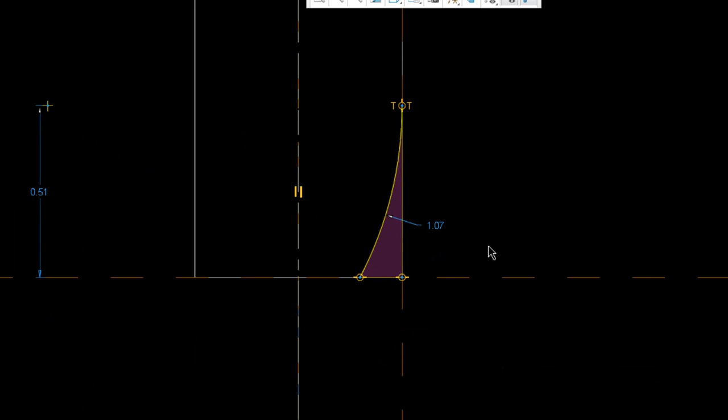I'm going to put this dimension, and I want that to be like 0.2. And this dimension, I want to be 0.1, something like that. That looks about right. And I'm going to mirror that. So I'm going to middle mouse to get my white arrow there and select everything. And then I'm going to go over here to the mirror tool and select the center line. So I have mirror geometry there.

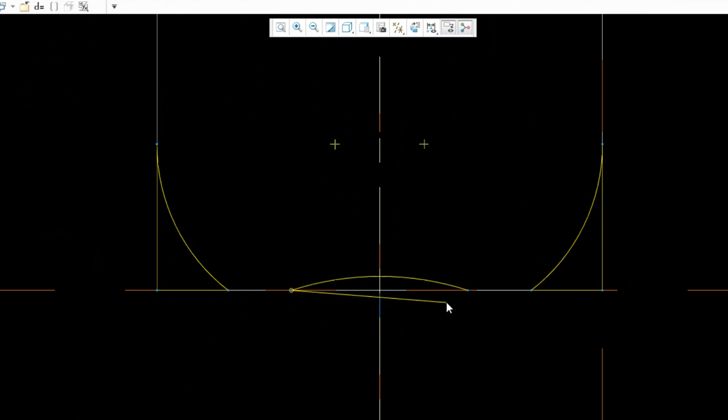And next I'm going to create an arc with center and ends. The center of the arc is going to be on this center line. Down there somewhere, and put it over here somewhere, and then snap it to there, and then a line connecting them. And I'm going to make these two arcs the same. Make this one equal to this one. And I'm going to control it with a dimension instead of the width dimension from there to there.

And let's say 0.1. That's too big. 0.05. And still a little bit too big. 0.03. Looks about right. And this is what we created. Right there. Just put that little in. That's a lead in for the clamp. That's what's actually on the part.

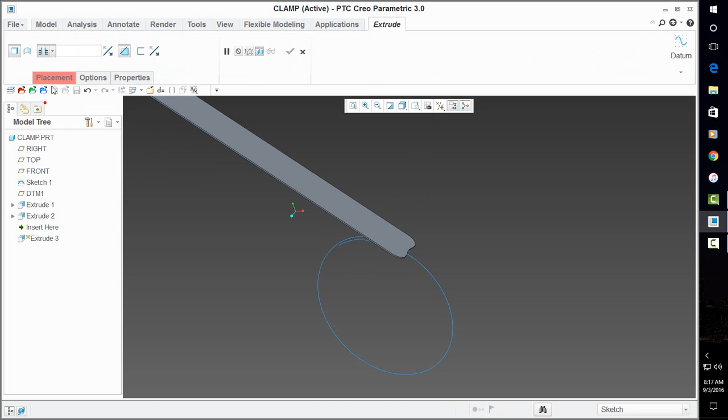So now let's put our slots in. So let's do it again. Let's do an extrude. Remove material and through all. Placement, define. Just use the previous same we did before. And we're going to need that center again. So let's go back to references and let's get that front plane. That front plane creates our center. And let's get it out of shaded mode.

Okay, so the first thing we're going to do is create a construction point here and put it somewhere here. And it's controlled by this dimension. Let's just make this 0.15. And next we're going to create a line. And we're just going to pick a point out here to the left and above that point. And we're going to snap it to that. And then we're going to pull it until we see an M.

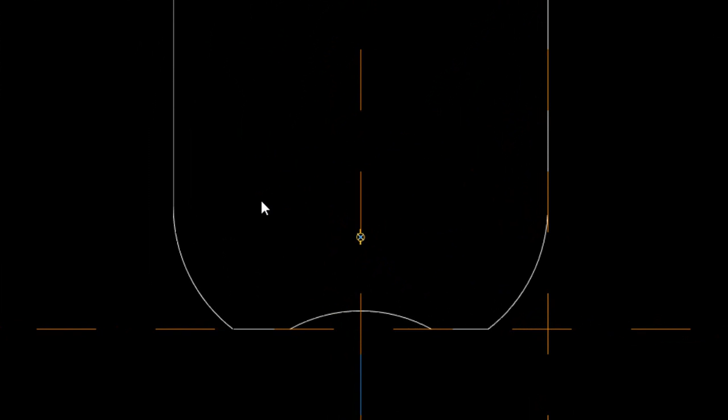If we don't see an M, let's try again. Let's put it over here. Drag it. There's an M. I could right click and lock it. So that point is in the middle of that line, so that's symmetric. These two ends of this line are symmetric about this. Next, let's put a dimension for the length of that line, and we've already measured that, and that's 0.21.

And then it had an angle of 7.5, so let's put that in there. From there to there is 7.5. And that is our construction line. So let's make that construction. Click on it, make it construction. We could have toggled it on and off over here with construction mode, but to me it takes too long. Arc center ends.

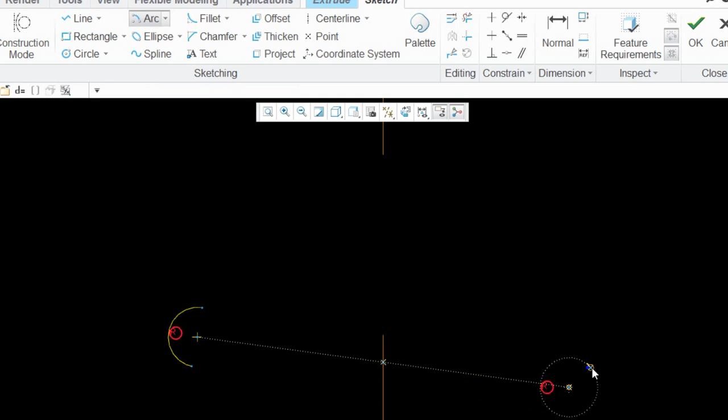Piece here, out to here, over to here. Same thing over there. Let's lock the radius. I want equal radius, so let's lock it with the right click. Right mouse locks it on that radius. And swing it around here. And the line from here to here, and here, and here. And let's go to tangency, make this tangent, and this tangent, and this one, and this one.

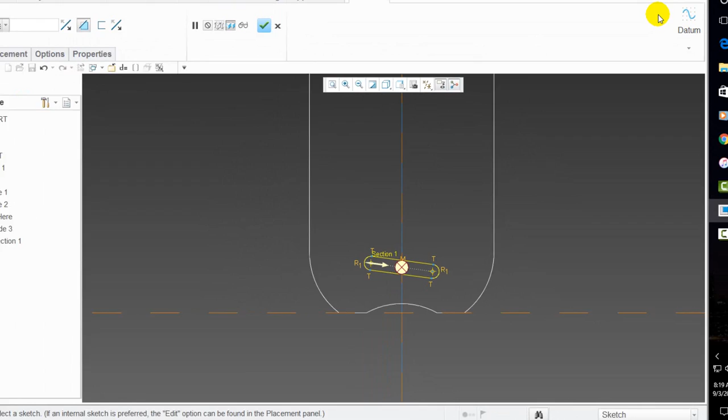And I don't want a radius controlling its width, I want a linear dimension, so I'll put from here to here. And that dimension is going to be 0.046. So there's our first slot. Select OK. And it's still selected, so I could right click and go to pattern.

I'm going to select this 0.15 for the dimension. And let's make it 0.1. That looks about right. We'll tweak this later. And let's start out with, say, 36 of these things. So there's our slots.

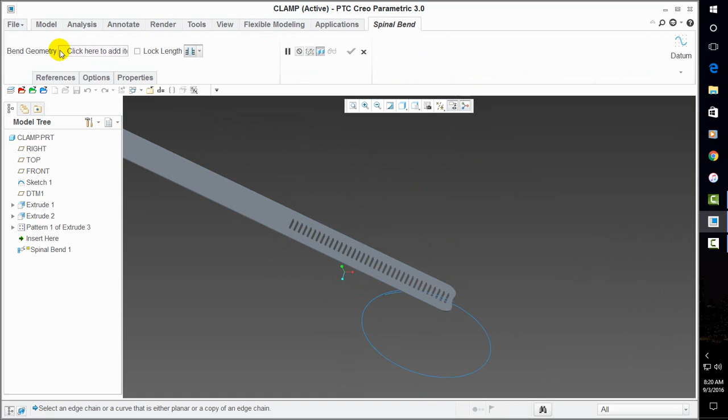There we go. And now we're ready to bend this around that arc, or those curves. So let's go to Engineering, Spinal Bend. This is a little bit different now than Creo 2. We want our bend geometry, so let's click here and select our geometry. And then for references, we're going to select here for our spine and select the spine, which is this.

And if it was correct, you see it would automatically snap and give you a preview. But it's not. And that's because our arrow here is on the wrong end. It should be on this end. If yours is there, all you got to do is pick on the arrow, and it moves it to the other end. And as you can see, it snapped right in.

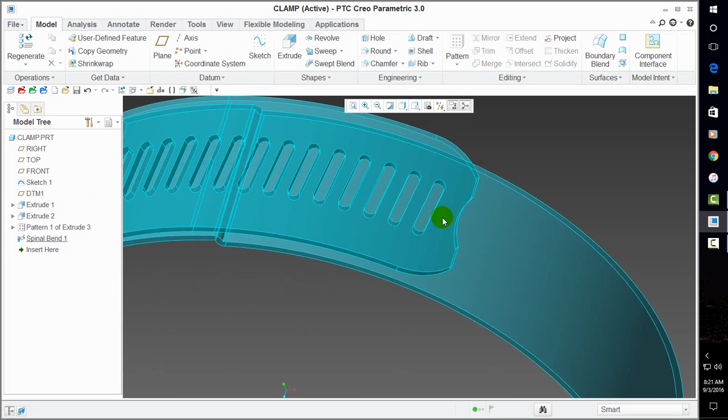Now, if your spinal bend fails, a couple of things you could try. If you could fix it just by going to your accuracy, setting up accuracy again, and making that even tighter, like a half a thou, and it fixes it, then you've got a piece in here that's just too small. And I found sometimes that these slots, when I'm modeling them, if I just change their size just a little bit, it'll work.

So if your spinal bend is failing, try changing the size of your small features. Anything like this that's getting warped around here. This is basically the spine just warping the material. So if you start failing, try changing some of your small dimensions to a little bit bigger. Not much bigger. I've actually fixed it with as little as a thousandth of an inch bigger dimension like this. This 0.46, if I brought it down, I think it would fail.

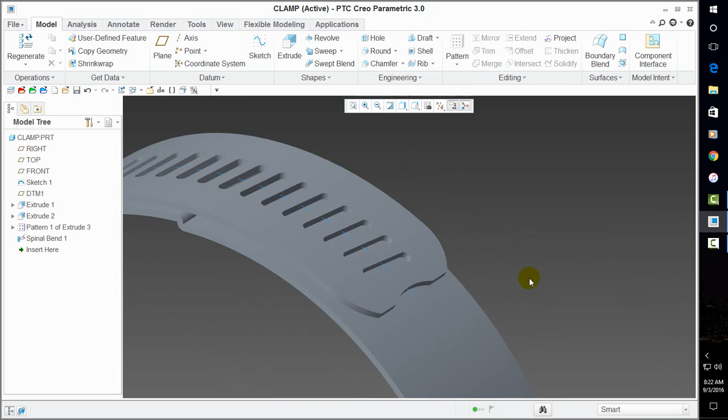I'm not going to go through that exercise, but if it does fail, you're trying to create your arc, one of your dimensions is too small, and if you need it to be that small, you need to go change your accuracy to cover that. I don't like making different accuracy parts. I like all my parts to have the same accuracy, like all my inch parts have 1/1000ths for absolute accuracy.

That being said, you should be in this position right now if you were following along with me and you did everything I did. And I just want to talk about that S-curve. Remember I told you we're going to make our radius a little bit bigger than half of the diameter. The reason I did that is so I end up with a small round here. And that's also what I mean about creating small features.

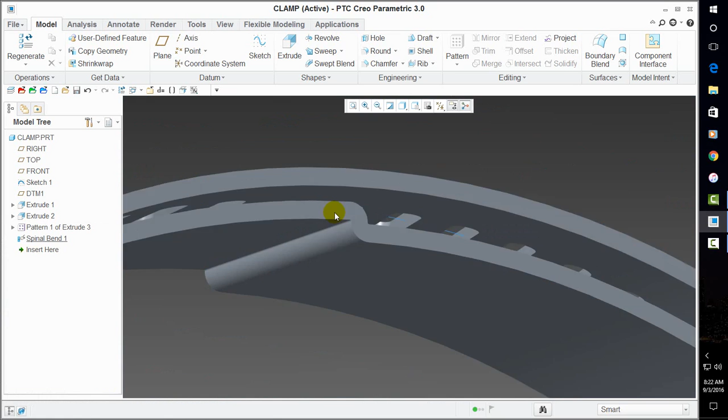If I were to make that smaller, this will get smaller and smaller. If I made it equal, there'd be a straight edge there. If I made that radius the same as the thickness of this band, that would just be a straight line. But if I made it even closer and closer, it would create these really small pieces, and you might get a geometry check. So our band is complete, and let's see if it works.

Let's go down to our smallest diameter, which is 1.75. So let's try it out there. I'm going to change this to 1.75. Make sure it works. And I'm going to be checking a lot, and when I do check, I like going to Tools and making sure geometry checks is off. I don't want to see anything happening here. Any geometry checks we get, we'll fix them.

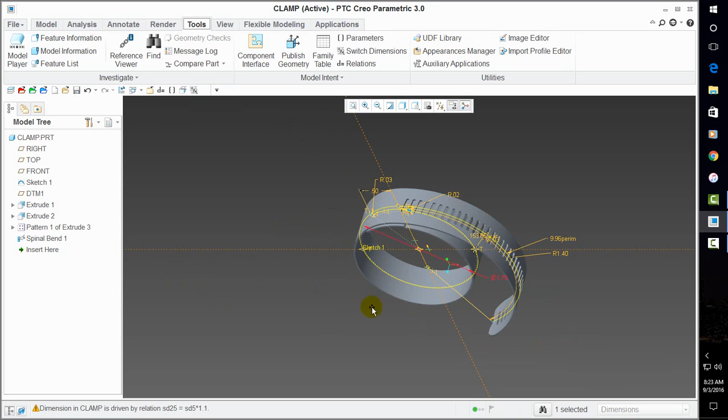And I'm going to exercise this band. Maybe I'll change the hose dimension by 0.1 and check, 0.1 and check, and keep doing that, and I'll show you how to do that. But right now, I don't have a geometry check, and that's the way it's supposed to look. This is probably going to have to be tweaked a little bit. That looks like a little bit too much of a gap now. But we're going to fix that. We're going to tweak all this stuff.

So let's put it back to the maximum. So this number here is going to be 2.625. And let's regenerate that. And I'm going to save what I got. And now we're going to create the geometry that goes here, that's welded on.